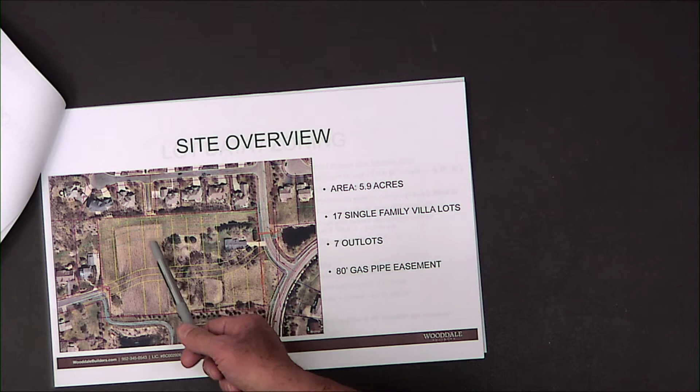First of all, 9560 Stable Path is the location. I got this right here? Okay. A little bit about Wooddale, which I've introduced. The site overview. We're looking at 5.9 acres. We're looking at 17 family villa style lots. This product is an empty nester type product, and I'll tell you a little bit more about that as we go. We have 7 outlots, which are to the north property line here. Talk about that a little more. We've got a gas line that's running down the property, down the center. We have 40-foot side setbacks for each side of that.

Lot information, our standard size lot, which we had mentioned. The standards for the R1 9.5 lots is 70-foot wide lots, 9,500 square feet. Front yard setback is 30, rear setback is 20, side yard setback is 5 on each side, or 5 minimum, and a total of 15. We have a 50-foot right-of-way, and we have a 28-foot wide street,

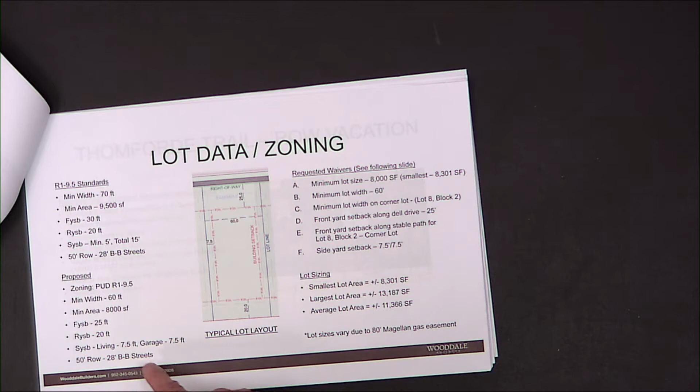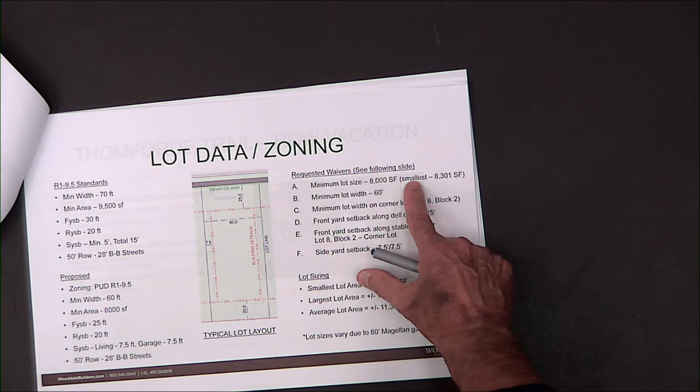back to back. The proposal tonight is we're proposing 60-foot wide lots, a minimum lot size of 8,000 square feet, front yard setback of 25, rear yard setback of 20, and side yard setback, we would meet the 15, but we'd propose 7.5 and 7.5. We'd still have the 50-foot right-of-way, and then 28 feet on the street. They're requesting waivers for this development. Minimum lot size, 8,000 square feet. The smallest would be, here, 8,300. Minimum lot width would be 60.

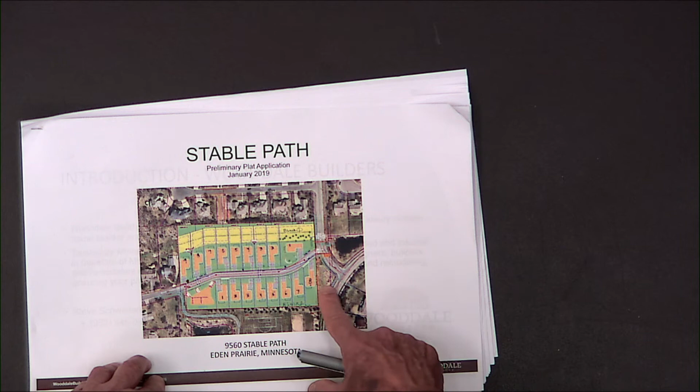Also lot 8, which I'll go back. Actually, I'll go forward a little bit. Lot 8 is here, is the proposed corner lot, which we are looking for. That is also a 60-foot wide lot, but we're looking for a side setback for a side lot property setback. Because of this large area, it's not going to affect Stable Path.

Lot sizing, the smallest lot is 8,300 square feet. The largest lot is 13,187. Average lot size here that we're proposing is 11,366. The Magellan gas line easement is 80 feet.

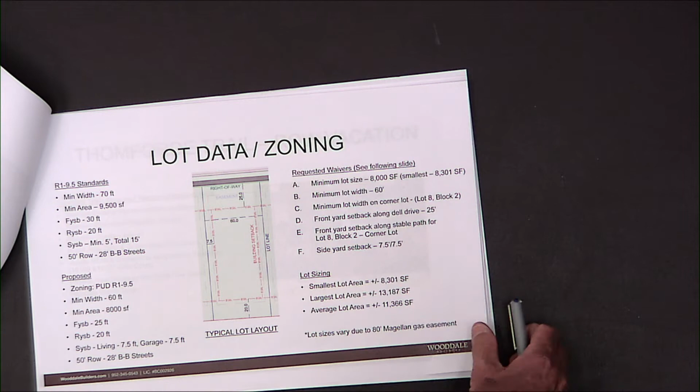On Thomford Trail, which is off of Cole Court, the development to our north, we are vacating that proposed street. We've met with the neighbors over there numerous times, and I pretty much have got everything worked out as far as meeting the requirements for the vacation driveway. There's a side driveway that has to have a 4-foot side easement or 4-foot side setback, which I think the requirement is 3, but we're going 4. And the long and the short is this road is being completely vacated.

The city is requiring us to take up the road, remove the existing curb and gutter, remove water main, relocate the fire hydrant, which we're relocating across the street here, or here. Abandon the sanitary sewer, install new curb and gutter on Cole Court, and we are dedicating to the neighbors both of those particular addresses. We are providing that, like I'd mentioned, new driveway at 18109 Cole Court. Relocate storm sewer.

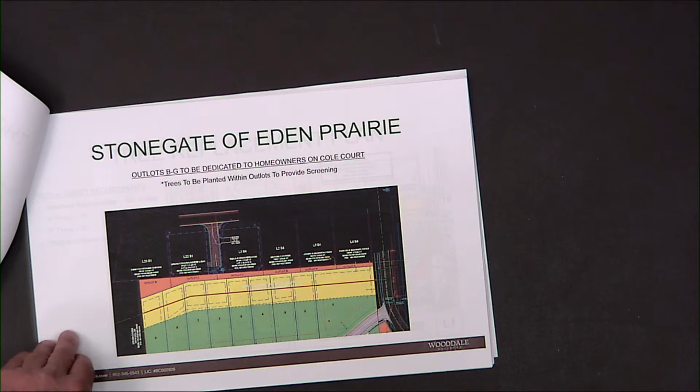To the north of the property, we have outlots. There's 1, 2, 3, 4, 5, 6 outlots that we are proposing to give to the existing property owners that are to the north on Cole, to make that part of their property. That's also going to be the area where we're going to be planting quite a few trees, and I'll show you that in the landscape plan. Here's the gas line again.

Tree replacement plan. We're proposing 427 inches of replacement. 4-inch trees, 37. 3-inch trees, 93. There is a list of trees here that's hard to read on the types and things, but we've run them through city staff and they've approved that.

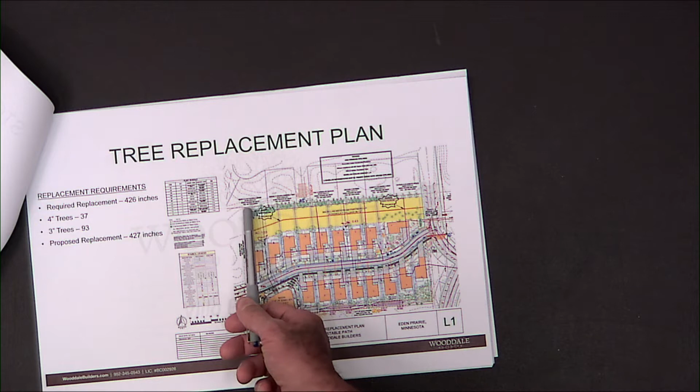Here to the north, where that 10-foot easement is, it's showing a lot of trees that we're proposing. The existing tree line is now on the Cole Court property line, is pretty scarce. So the homeowners are pretty excited to see that many trees get planted in that area. And then obviously we have tree plantings throughout the development.

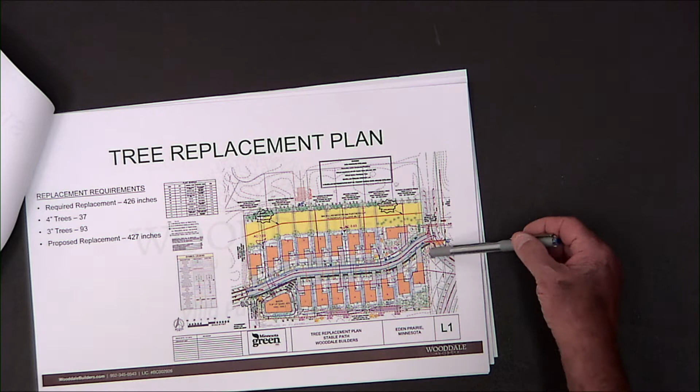One of the things that I did talk to staff about a little bit, and they were a little negative on it, was this triangle-shaped area, because we do have utilities there. I'd like to plant a few trees there, so that we can screen that area and make it look a little better.

Little bit about the product. Again, we're about 1,900 to 2,000 square feet. We're slab on grade. We're gonna have options. We'll have 4-season porch. We'll have 2-car front-loaded garages. We'll have 2.5 car side-loaded garages. We'll have side-load 3-car garages. We have some possibilities that people might request a second floor loft, smaller loft area.

First floor, we do have 2 bedrooms. We do have a first floor study in that square footage. We will have association maintain the development, so meaning sprinklers, snow removal, landscaping, sod maintenance, exterior maintenance, and garbage will be part of the association.

A little bit more about the product. Just give you a brief overlay. When we talked to city planning, they were interested in seeing some different variations in the product, meaning different elevations. Here we're showing kind of that modern farmhouse look, black windows, board and batten, and would be all white with the dark windows. It's kind of in today. All of the units will have front porches, and all of the units will have either a rear screen covered porch or a 4-season porch.

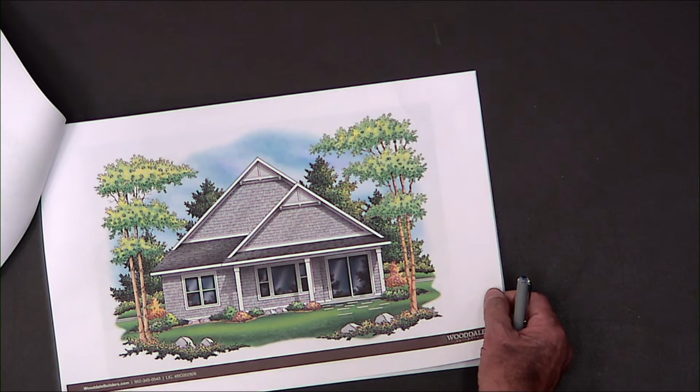Here's kind of an elevation showing what we've done in Bloomington, which shows a side load garage. And it shows a little bit of variation of some different products. We haven't nailed down the final products. We want maintenance free. So this particular elevation is showing a board and batten. They are aluminum soffit and fascia, which is maintenance free. But this particular home has got a high-end vinyl shake siding, and the other option would be to use Hardie products, which would be job site painted, but then again, would be maintenance. So we're still working through that.

This just gives you a little idea of what we've done in other areas. This is showing a Bloomington development with all on the bluff, all side-loaded garages, lots of different elevations, and that's what we're proposing that this project will look like. Get a little bit closer shot there of all side-loaded garages.

Now, city staff did make a comment that they wanted us to change up the driveways. In other words, don't all have them facing going down the street. Well, I'm opposed to that because it's a nice look once you get everything built, especially if you're doing side-load garages. If you have front-loaded garages, I would agree that it's kind of a negative, but once we get the marketing started, I think that most people purchasing over there are going to want the side-load garages.

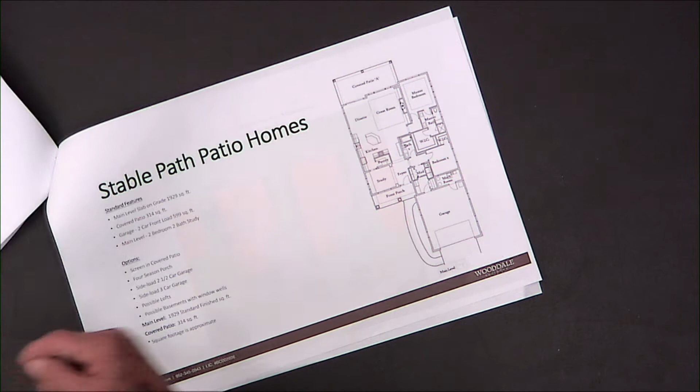Gives you an idea of our floor plan. We do have a master suite, secondary bedroom, master bath, master closets, first floor study, kitchen, dinette, great room open, and then the covered back porch, which would have an option for 4-season.

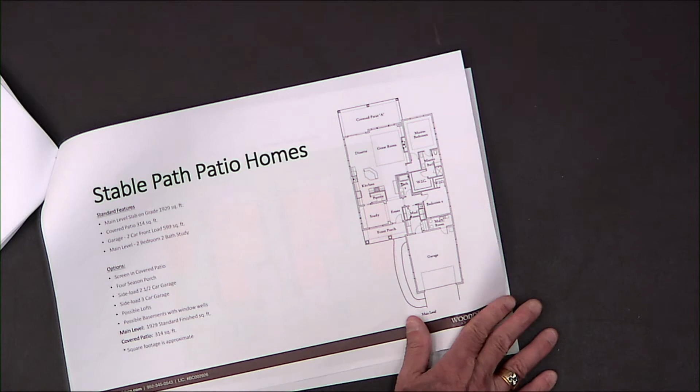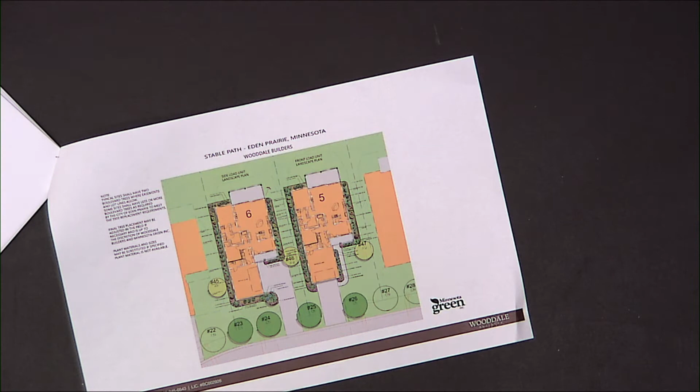We do have landscape plans proposed, standard, for both the front-loaded garages as well as the side-loaded garages. And we are at this time really probably looking to get concrete driveways versus asphalt, but again, we're still in the price mode, so we'll work through those details. Other than that, that's my presentation. I'm open for questions.

Councilmember Nelson? About what is the price point on these that you're expecting? Well, initially, in all honesty, we're trying to hit 550, but I know we're pushing 585 to 650. Given the small size of the lots, why is it so expensive?

Because obviously, if you had regular sized lots, you would be talking about maybe 15 houses. And it's nowhere near even the average price in Eden Prairie at this point. And it's a lot higher than similar style homes, though some of them may be a number of years old. But I like the smaller side lots and such to make the style of home, but usually that goes with a little lower price points. The average house in Eden Prairie is more in the 400,000 category. You could see 450 or something, but 585 with the very low or lower land costs given your size.

How does that work? Well, like I had mentioned earlier, we're building these units in Bloomington. The earlier picture I showed you with the side-loaded garages, those lots were 60-foot wide lots as well, and they all had side-loaded garages. And those price points were anywhere from $750,000 to $1.2 million. In Plymouth today, we've got a project that's got, I think, 12 villa lots and 42 townhome lots over there. The average price point in that project is $650,000 starting, and it goes up to $1.2 million.

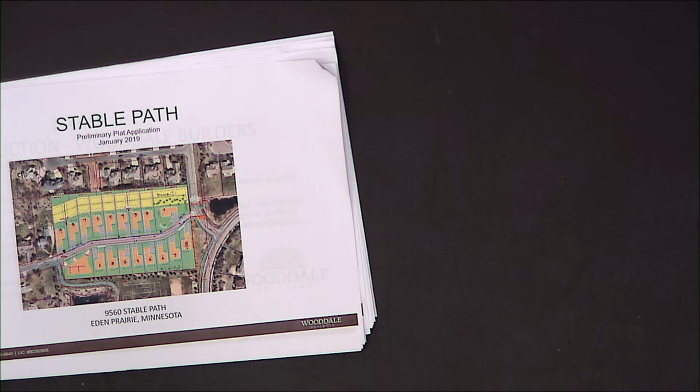The other question I have is the gas line going behind the houses, right? And how close is that to the house, the gas line, and any potential risk there? Well, in most cases, we have 5 feet behind our porches, so another 40 feet. So we're averaging about 45 feet from that pipeline. And from the Cole Court property line, it would be 40 plus the 10, so it'd be 50 feet there. Okay.

You mentioned there will be 8 different colors for 17 houses. Is that, I'm just curious, is that too much? It'll be really multicolor for 17 houses. Did I read that right? It's 8 different stones. Okay. And I think we have 5 different colors, meaning like beiges and whites and grays is very popular today. There'll be a light gray, dark gray, and a charcoal color.

So I think this question is follow up with Kathy's question in terms of sustainability. Are you planning to, from the get-go, having LED lights and water conservation aspect in this building? Or the owner later on had to convert all that themselves? I didn't quite get the question. Yeah, so do you have any provision to minimize the water usage in the house, or the lighting, more low energy, high efficiency lighting, like LED lighting and so on?

Well, again, codes have changed. So all of the light fixtures, recessed lights, all of the bulbs, all have to be LED approved and listed for every unit. Is there any special water? I'm going to say no. Thank you.

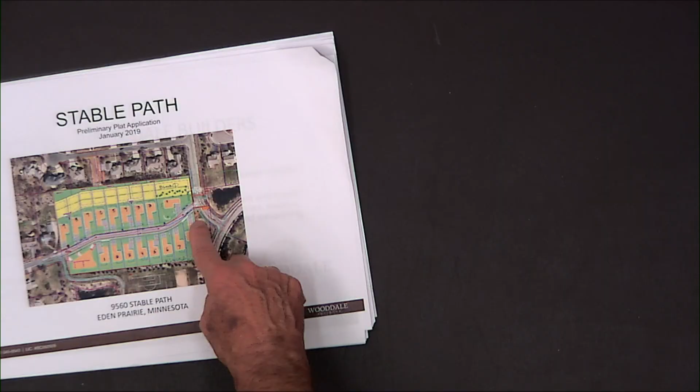Before we open this up to the public, any other council? Oh, I'm sorry, I missed it. Councilmember Freiberg. Thank you, Mayor. A couple questions. I just want clarification a little bit. I see the city requirement was 426 inches of trees that had to be replaced, and you're going to do 427. Right. We're talking now this triangle lot to the east, that you wanted to put some additional trees. Yes. I just wanted to clarify if what you wanted to do, is that on top of the 427 or part of it? That's the first part of the question. That would be part of it.

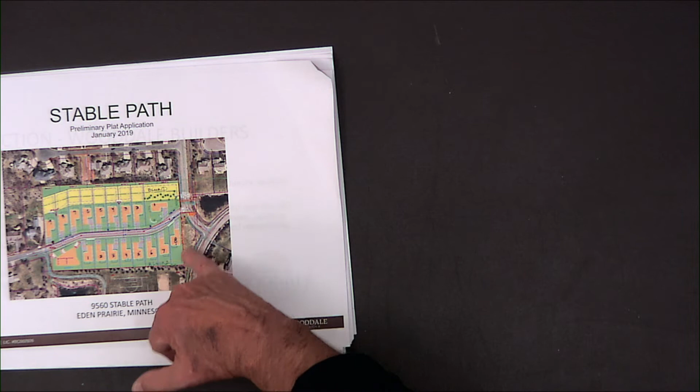Okay. You know, we are really, I'm going to use the word cramming trees to get that many inches in there. So I'd like to space it out a little bit more. There are a lot of significant trees already along the park line back here. Those aren't trees that we're planting, they're already there. So without getting too many trees, I'd really like to get some nice screening here, and hopefully we could work with the city, working around the utilities, and there's a power line there, but maybe get some screening there. Then the second part of my question would be directed to staff on, what was the pushback on that?

Councilmember Freiberg, so there are utilities that are located in that property. I believe that's city property. It's not the developer's property. And I can guarantee you, when we go to rebuild Dell Road in the future, we will have to do stormwater treatment. And trying to find sites where we can manage our runoff and do the treatment is very difficult. And I don't like having to condemn private property to build those facilities. So I know that we will use that in the future. And if there's trees there, then we're essentially taking down trees. Homeowners wouldn't be happy about that, and I think that could create its own set of conflicts in the future. Absolutely understood. Thank you.

Anyone else? We can have more council comments after the public hearing. So hang on to them and write them out. So this is a public hearing. Are there any people in the audience who wish to address the council on this issue tonight? Please come forward, give your name and address.

Hello. Mike Burns, 18091 Cole Court. I'd like to thank Wooddale. I think they've done a great job in working with the current neighbors there, so that I appreciate. The only one thing that I would request is, I'm on the north side of the property, and there's talks about putting trees there. We haven't seen a tree list. If we could just continue the cooperation of working to see what trees would go there, it'd be really interesting. I think it's important, if we could have a say, that would be great. And I'm not just talking for my property. I think all the neighbors along that side would like to talk about what we put there. Thank you. That's usually doable, so we'll make sure to throw that in as a suggestion, so thank you. Others?

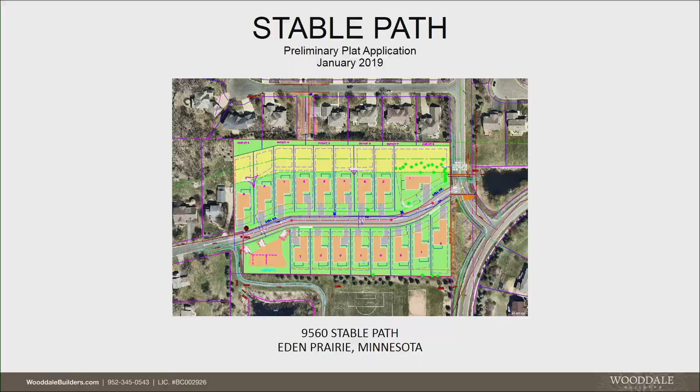I'm still concerned about the side yard setbacks on this price home. I'm going to support it, but I think the houses are small for the price, and I think the side setbacks are small as well. I would expect a little different kind of development from this, but I know it is something that's at least fairly popular with people at that size. But I guess in the future, I expect to see us getting a little more for the narrow setbacks.

Can you say more about that? What do you mean by getting more, like a lower price point, or? Well, something. There's a lot lower land price when you're taking away. Instead of doing 10 on one side, 15 on the other side, doing 7.5 on either side, you're cutting back from the front, you're cutting back from the back. And we do have a number of these around town. They're at multiple price ranges. But we are giving up something to go to this kind of development.

And I've always hoped, and in most cases we have gotten, a more average person price because of the smaller land size. This doesn't have it. It maybe fits the neighborhood pretty well, but I would urge staff to look for more in the future when we're doing these small side setbacks, because I'm not going to vote yes forever if it's always super expensive stuff.

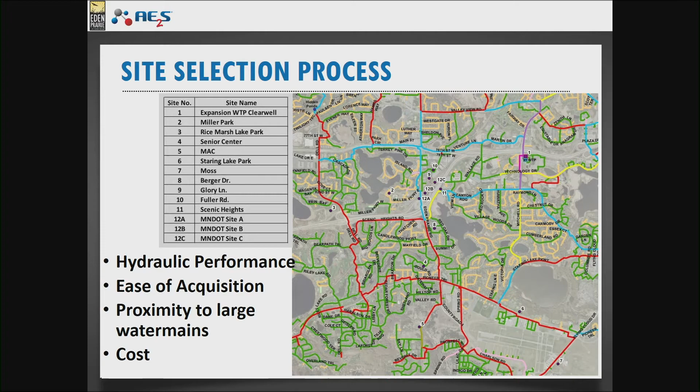Also included was a lengthy and deliberate site selection process that I'll highlight in this next slide, in which 14 properties were selected as the most viable water storage sites in our city. And we measured factors such as the hydraulic performance of the pipe network to service each site, the complexity of acquiring the property necessary for the site to be placed, the amount of additional construction necessary to connect the site to large diameter water mains, and of course, the cost of each option, especially where large plumbing changes were necessary in the community nearby in order to make the site work with our existing system. This brought us the most favored site where we are currently planning to build the facility.

This aerial view of the site shows the planned facility immediately northwest of US Highway 212, just east of Eden Prairie Road, and bordered on the northwest by Hennepin County's Regional Rail Authority property that serves as a public trail managed by Three Rivers Park District. The land was owned by MnDOT when we identified it as our most viable site, and we purchased that property through a series of steps in March of 2018.

We are currently in the last stages of acquisition of the access lane to this site, indicated in red on this graphic. MnDOT is drawing up the legal property transfer documents, and we expect to receive their offer for the remainder of the property by early to mid-March, perhaps even sooner. This site provided us with an unforeseen opportunity to highlight a portion of Eden Prairie's historical past by its proximity to the first city center of the village of Eden Prairie.

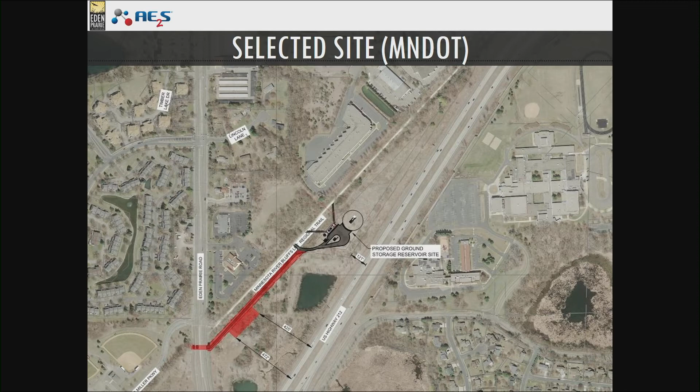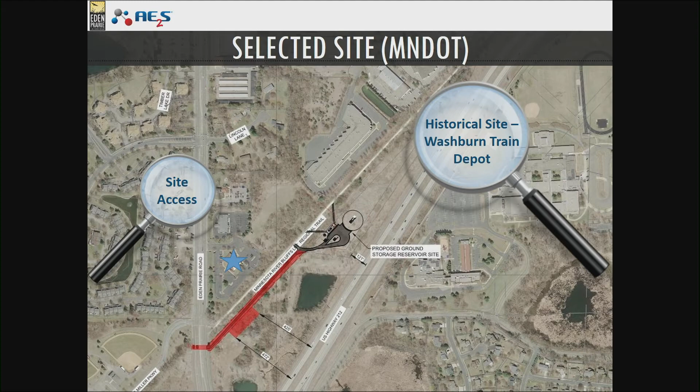On this slide, you see a blue star, which indicates the approximate site of Eden Prairie's first railroad station. This was known as the Washburn Depot. This site is just south of the current Washburn-McCready Funeral Home and at the proximate site of Resurrection Life Church on Glory Lane. The original Minneapolis and St. Louis Railroad that passed through Eden Prairie and served our community was along the existing railroad grade that currently carries the regional trail.

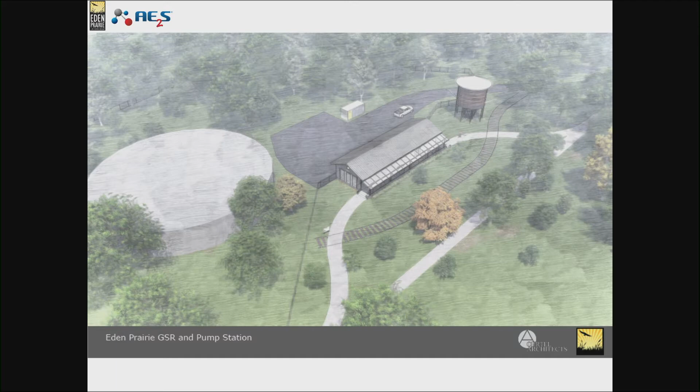Our parking apron and access trail configuration have since changed through iterations of design since this view was created, but it gives an overall good impression of the site layout, including a pump station design which is artfully representative of the Washburn Depot. It's complete with an optional wooden water tank and a railroad spur indicative of the site. This is the most current view of the planned property layout, showing a drive around at the rear of the building as a rear access site for semi-trucks and a straighter pathway between the regional trail on either side of the front of the building. I'll explain the pump station in a couple of slides with respect to its historic design intent.

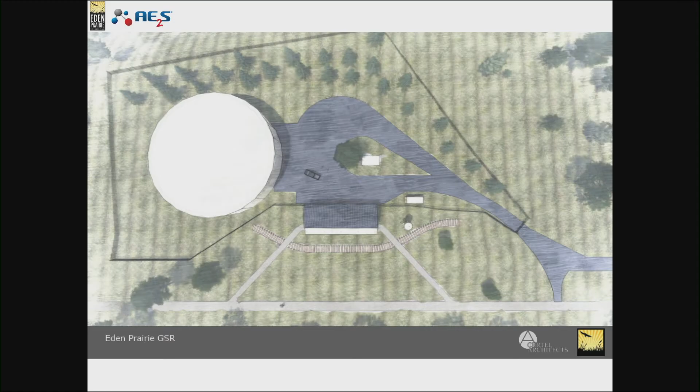Key features of the site plan include design components prepared with specific purposes in mind. I'd like to start with access to the site on the west and working across the drawing. Underground utilities, water, sewer, electricity, and gas are planned from the most expeditious connection points, and permits with Hennepin County and Three Rivers Park District are required and agreed to beneath the regional trail, and for all trail connections shown at the 3 locations near the top of the image.

Construction access and egress to the site will be from Eden Prairie Road, entering along the new property being drawn up by MnDOT, and exiting back out along the regional trail itself. This is a solution that was suggested and even approved by Hennepin County Regional Rail Authority. Permanent access will be provided on a 14-foot wide rural-type asphalt lane, intentionally sloped to cause rainwater runoff to accumulate in a ditch that lies between the road itself and the existing regional trail.

A stipulation of our rainwater runoff plan is that all stormwater on site must be accumulated on site, must be managed on site, and infiltrated to the greatest extent possible. I'm sorry, I jumped ahead. The water accumulating from the access road will gather in a detention pond that is created alongside the trail, and it's important to note that the design stormwater infiltration plan for this particular site actually improves upon the natural infiltration that currently exists in its natural state, and it could actually help with water quality issues in downstream waterways.

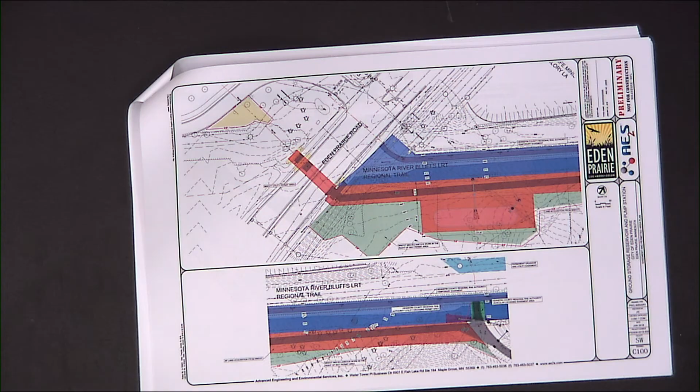The stormwater pond on this view, which is highlighted in green, collects water from all impervious surfaces on the construction site and is designed to infiltrate the water through a series of sand beds that we discovered in our pre-design investigation of the soil conditions. Just southwest of the pond will be the gated access to the site, which is actually the second gate between Eden Prairie Road and the facility. A gate to prevent vehicular access from entering the lane which we will be constructing to access our site was required by MnDOT as a condition of conveyance of this property to the city. They would prefer that vehicular traffic don't accidentally take a right turn onto this lane and find themselves stuck on a dead-end road.

In the center of the truck turnaround is a teardrop-shaped island in which the emergency power generator will be installed to provide just enough electricity to power the site to make it function at the city's base demand of water use. Surrounding the southwest and southerly exposures of the site, I'll point to that with my cursor, is a large berm. This earthen berm will be constructed to a height of approximately half the height of the water reservoir itself. And the berm will obscure all but the top from the highway. If you're on Highway 212 eastbound, you'll be able to see the roof of the dome. However, we plan to plant a series of pine trees on the top of this berm, which will provide additional natural screening to obscure the dome when those trees are mature. I will show views of that in the rendering.

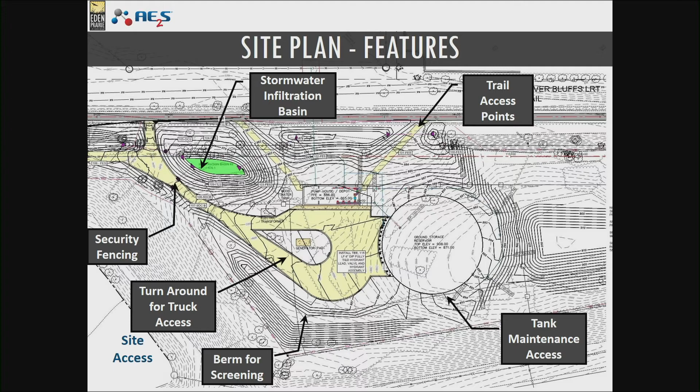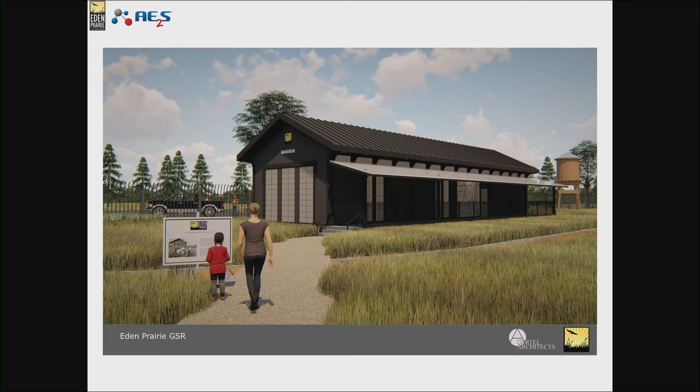On this next view, we see that the building design draws significant influence from the historic train depot building itself, without attempting to recreate the exact size, shape, materials, and layout of the original. We chose to do this in order to facilitate the new program and function, utilize modern materials and construction methods such as our building code will allow, and to satisfy the general need for increased security and reduced maintenance of the structure. Working with the required elements for the function of this building, we maintained the long and narrow footprint for the building while adding a loading platform, which gave us an opportunity to include the unbalanced overhangs and the slightly changing flatter pitch from the original building.

We plan to use a wooden type siding material and will work with the supplier to obtain a narrow but cost-effective exposure. One thing I should note, it was a real challenge to get a long skinny building to contain a municipal pump station of the size and design that we really needed to serve our tank. The pump station itself is actually beneath this. The platform where the public can approach and walk across is actually a portion of the roof of the pump station which lies beneath the station. So it's about 15 to 20 feet wider than the building. It's like you have a large pump station in the basement, and the top end is kind of a different function.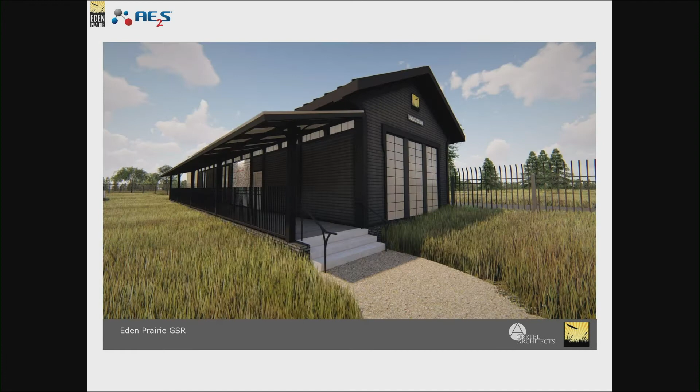In this next view, you see the primary and end elevations. We pulled some of the unique and specific design details from the original building, including the curved soffits. You can see here we don't have an angled soffit structure, but it's actually curved. That's just like the original building. Also, we see flared window trim at the top of each window. By the original design, it was a full 6-inch wide piece of trim at the top, which tapered back to about 3 inches, going down most of the length of the window. We kept that, thinking that would be replicating the original design of the structure.

The historic sign, we've also noted that the sign downstairs has a rounded configuration on either end. We're going to change the design to actually look exactly like what's downstairs.

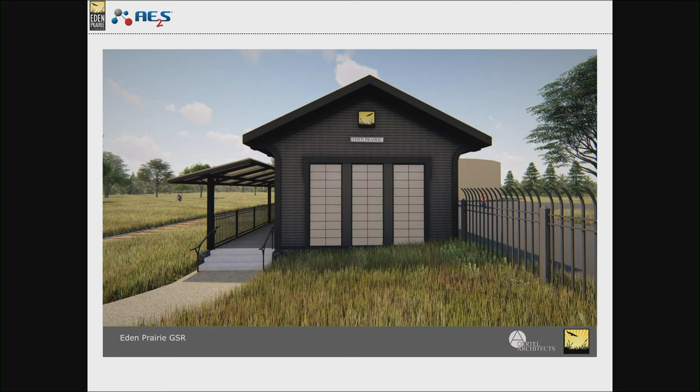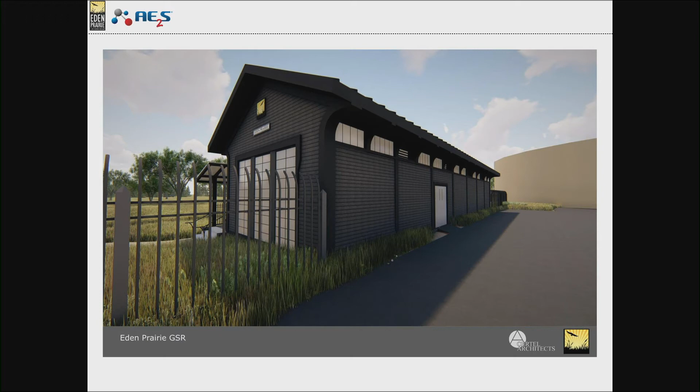This view shows us the south side or the back side of the pump station, which is inside the security fence. I should note that the tank in the background is actually about 10 feet higher in this rendering than it would be in real life, but it shows the portion of the tank wall that is at its highest and how it would be visible from behind the building. This is where employees would enter, and as necessary, we may have ventilation structures included in the building that would not have to be architecturally visible to anyone else, but on the backside, who cares? It really actually makes the building much more functional.

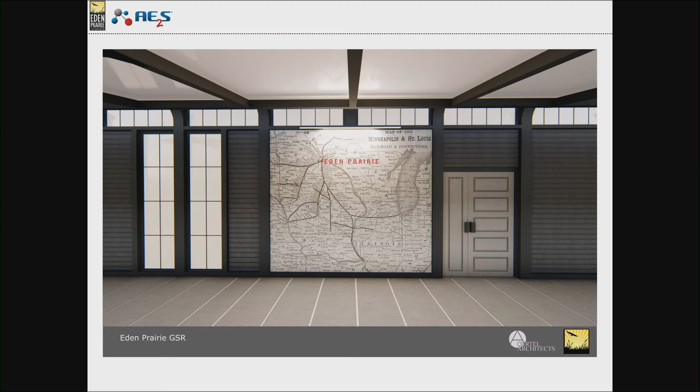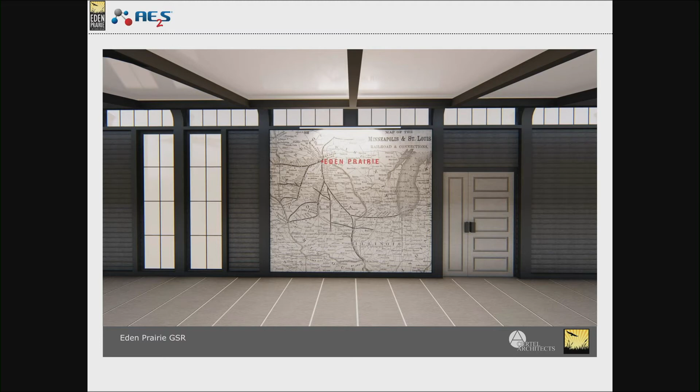This view is the front of the structure visible to the public. It shows the platform. We've added a regional map of the Minneapolis and St. Louis Railroad. It's just an idea at this point, but represents an example of signage that could be developed to better explain the historical nature of the display in collaboration with the Historical Preservation Commission.

Note the double swing door. That's representative of the 5-panel doors that were in common use back in the 1880s. And the very functional light panels above, just below the roof line, provide a significant amount of light to the interior without electrical lighting necessary for that purpose during the daytime.

So with that, I brought my set of plans with me. If there are any other questions that you might have about the facility, we're very excited that we can do both a public service function for water and a public service function for signage, history, and something that we really expect to have a lot of public support. Thanks for the presentation this evening.

Mr. Getchell, just before we begin to go through the process here with the public hearing, just to be very clear, the presentation was on the details, but tonight we're only being asked to approve in concept the PUD, correct? And then also the zoning change. Is that correct? You'll come back to us on funding of this and the building specifically, and whether we do that small decorative tower and things or not.

So I'll let Robert answer the second question, but the first question is, this is land use approval. Right. That is correct. I know that the money is budgeted in our capital improvement program for this too. We've been talking about this for a few years. When it comes to bid specifications and bid timeline, Robert can probably answer that.

Mayor Case, so what we were thinking is that if the approvals of the zoning, the waivers were approved tonight, we would go directly to bids, and we would be bidding that water tower, the old wooden water tower, as an alternate, as well as the train tracks as an alternate. So when the bids come in and we come back to the city council with a recommendation for a construction award, we could evaluate whether or not those components would be included in the project or not.